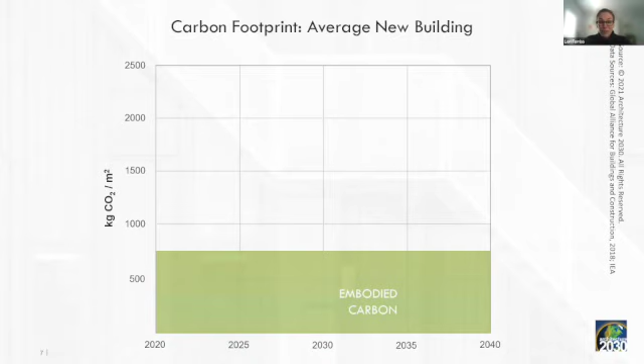When we think about new buildings and the rate at which we're constructing, we know that the embodied carbon, the upfront carbon of new construction, is very high. And when we're looking at needing to reduce our greenhouse gas emissions by at least 50% by 2030, and to decarbonize by 2040, we just don't have a lot of time to make up these upfront emissions from new construction. When we look at operational emissions on top of that, we see the whole profile of buildings. Even if we're able to decarbonize their operations, we're still stuck with that high upfront carbon cost.

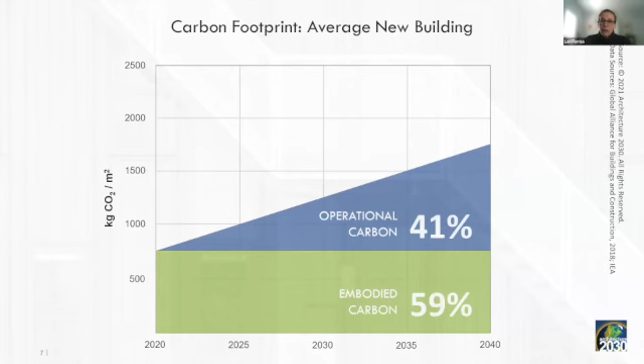We also know that existing buildings are responsible for the majority of greenhouse gas emissions, particularly in urban areas. For example, in Boston, over 70% of our greenhouse gas emissions come from our existing buildings. So we have to think about how we're going to address these numbers. We're not going to do it by building new. We have to really think about our existing buildings and figure out how to mitigate their environmental impact, both reducing our energy use and moving to fossil fuel free sources of power.

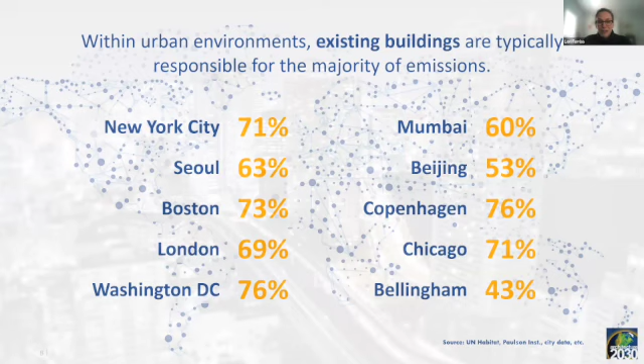And we know that most of these buildings are still going to be here by 2040. So by the time that we need to be net zero as a world, we somehow have to figure out how to address our existing building stock between now and then if we're going to actually hit our net zero target. So, we're coming back to this idea the greenest building is the one that's already built. We want to kind of shift our thinking about this and say that the greenest building is the one that's been retrofit, that we have to keep these buildings and we have to improve their performance.

So this is where the CARE tool comes in. That's the point of the CARE tool. It's not an embodied carbon calculator, and it's not a whole building life cycle assessment tool. It's really a tool that looks at both halves of the equation here, both the embodied carbon of construction of materials, both in the way we reuse buildings and in new construction, as well as the operational emissions. What are the emissions associated with buildings operating, existing buildings the way they are, buildings as we're able to reuse them and reduce their energy use, and new construction.

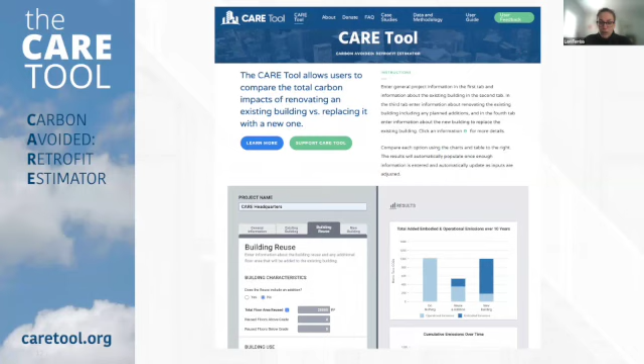So I think all of those voices have been represented in the development of the tool, which means that it's been a careful balancing act. How do we make it useful for all of these groups and provide enough detail so that it's really broadly applicable, but not so much detail that it's hard for many people to use, or that it's getting too far into the weeds. I'll talk about that a little bit.

But essentially what the tool does is it evaluates total carbon emissions, embodied plus operational, of existing buildings compared to replacing with new construction. I just want to reemphasize again, this is not an energy modeling tool. It's not a detailed whole building life cycle assessment tool. And it doesn't allow for a lot of user overriding of inputs or very specific inputs of information. And it is meant to really be used by a lot of people. It's meant to be an early level tool to ask that high level question about building reuse.

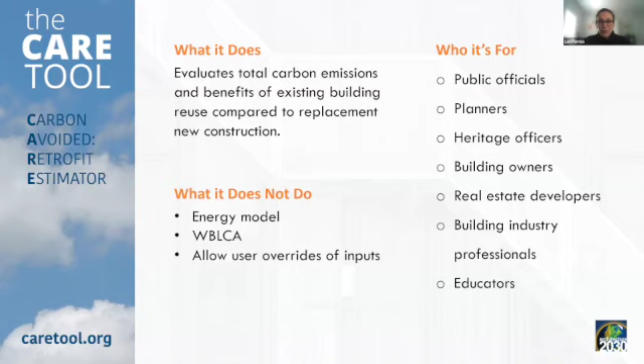So the idea is that it should be accessible to a lot of groups. It should be able to be used by planners who are trying to understand the importance of building reuse at the neighborhood scale, at the city scale. It should be useful to heritage officers who want to understand, for example, what are the carbon benefits of historic tax credits and how can historic tax credits support state carbon neutrality targets. For educators, we've seen a lot of professors wanting to use this for their students to help them build up an intuition about embodied and operational carbon in buildings, and obviously for practitioners, for many other people.

And I've already gotten into this a little bit, but the tool is pretty flexible actually. I think it can answer a lot of questions. And one thing I've heard from people who are experimenting with it is, "I think I'm using it in a way it's not meant to be used, but..." And my response is it should be used in whatever way you think is useful to answer questions. This could be looking at a single building. How much carbon can I avoid by reusing this one building compared to replacing it?

You can experiment with some of the parameters around that. So what if it's occupied and you can't do that much of an intervention to it, so you can only reduce its operational emissions by 50% or 25%? Then how does it look compared to, for example, a net zero new building? You can look at geography and grid intensity. Obviously, those impacts matter a lot when we're talking about operational emissions. And then you can scale this up and understand how existing buildings at the single building scale and then at the campus or city scale can really support decarbonization goals in the built environment.

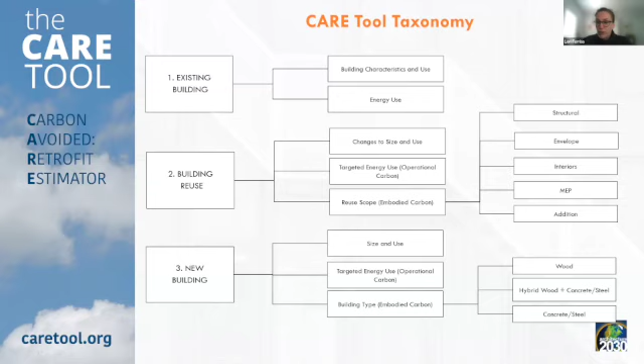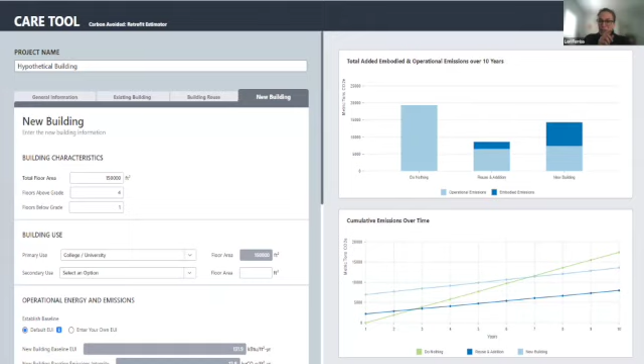And this is what it looks like in the interface. So on the left, you have all of your inputs, and then on the right, you have your outputs, and the output charts will live update as you play around with the inputs. You can experiment with different variables as you go.

And just as I mentioned, it runs through these scenarios. So first, there's some general information, which includes location, basically where is your project, from which it gleans climate information. The second tab is about the existing building, defining it. How big is it? What's its general composition? What's its structural system? What's it used for? The reuse scenario. Again, what are we doing to the existing building at a high level? Is there an addition? How much scope is there in terms of renovation? And what are we trying to achieve in energy use?

And then the new building can be the same. It could be different. For example, if you have a medium-sized building that you might renovate, but if you tear it down, you're going to replace it with something twice as big. You could look at that to understand the carbon footprint of that parcel.

And then in the end, these are the charts that come out. So on the top, you have total emissions for the selected duration, a time frame that you established, and on the bottom is looking at how those emissions play out over time. So you can understand at what point different decisions might be better or worse.

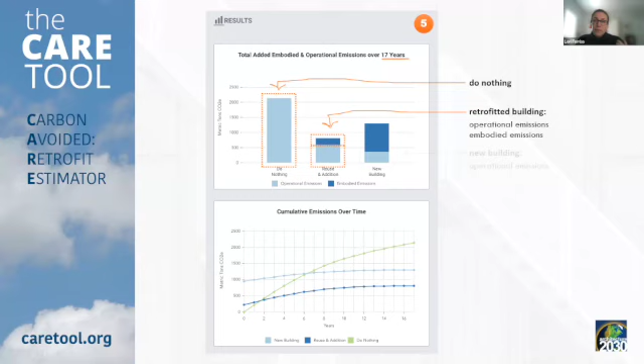So on the left, you can see what happens if you do nothing to the existing building. All the emissions are operational. In the middle is that reuse scenario. So we have, in this case, reduced operational emissions because we've made the existing building more efficient, but we have some embodied carbon associated with the renovation. And then in the new building, again, we have the operational emissions. In this case, it's a smaller bar, meaning it's even more efficient than the renovation. And then we have the embodied carbon, which is typically going to be a lot larger for a new building than it would be for a renovation because of all the materials going in.

And then on the bottom, we have our 3 scenarios shown over time. And you can just kind of see here the payback periods. I'm just going to highlight that in orange. This is essentially indicating that if you did nothing, that's the line in green, the building would operate as it always has.

If you retrofit the building, in dark blue, you have some embodied carbon in year 0, but that orange line happens at around year 1.5, which means that within a year and a half, the improved operational efficiency of this renovation has paid back the upfront carbon of renovation.

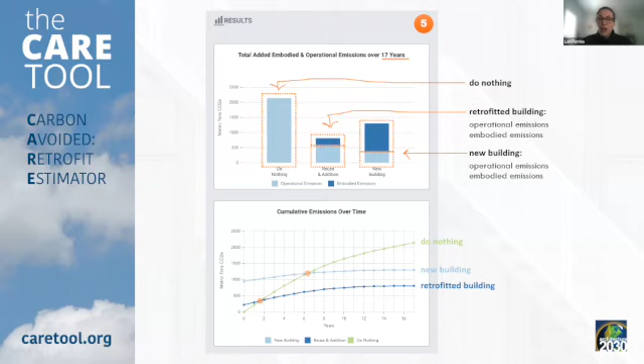As opposed to if you look to the new building, even over the 17-year time frame, the new building emissions are higher than the retrofitted building emissions, meaning that even when we look over time at a more efficient building, the new building isn't able to overcome the penalty of the higher upfront embodied carbon compared to the renovation.

I'm going to do just a little case study, but I think I'm going to do it live, easier to understand. And it'll act as a little demo. But I'll just show you this building here in Boston. It's the Boston University Admission Center, which we renovated in 2014. It is in a historic district. So while it was a comprehensive interior renovation, it was mostly a restoration of the exterior with some addition.

It was what would be considered a deep energy retrofit. It included interior insulation, roof insulation, high performance glazing, as well as new high performance systems. But with the entire renovation, we were able to preserve and reuse 86% of the structure and enclosure and reduce the operational energy use by 70%.

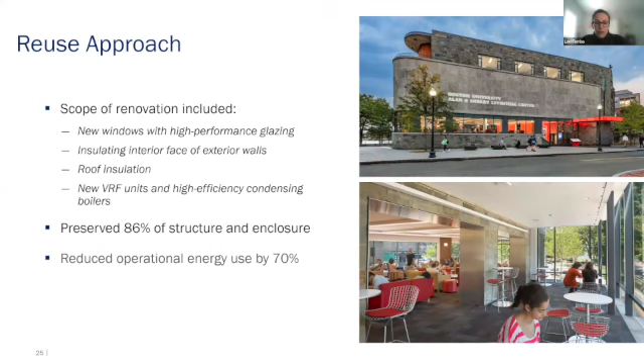So let's see, I'm gonna try and maneuver my screen here. Okay. Yeah. This is distracting. I think this will work. So you're seeing Care Tool now, is that right? Okay. Yeah. Great.

So here's the interface. I'll just scroll up so you can see the whole thing. There's a user guide, which hopefully is useful if you're using this for the first time and provides some guidance about selections users can make. There's detailed data and methodology. If you're interested in where the data is coming from and how the calculations are working, our intention is to be completely transparent about that. And there's also this user feedback button. If there's something that's confusing or not working, we really want to know.

Okay, the existing building is here in Massachusetts. I think it's not 02116, but it's close enough. I'm going to use the default climate information and the default electricity grid emissions, but I'm going to come back to this because this is where you can look at the impacts of the greening of the grid, which can make a big difference. And I'll look from now to 2030.

So I then go into the existing building. It's about 18,000 square feet, 3 stories above grade, 1 below. And it was a typical steel concrete structure. You can change the window to wall ratio if you have, for example, a historic building with 20% window to wall ratio, or new construction that's completely glazed. And this is college university use.

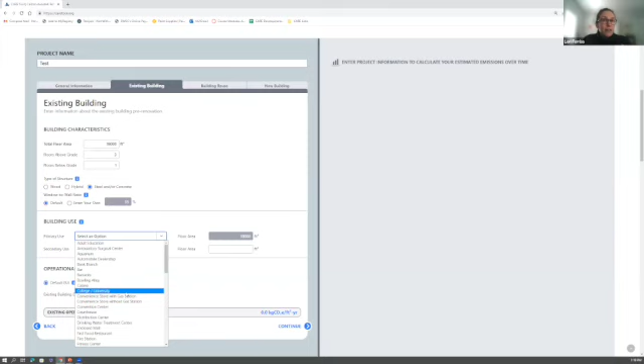I'm going to let it calculate a default energy use intensity for the existing building, although you can also enter your own here, including utility bill data if you have it. And this is going to make an assumption about the total operational emissions of the building before we renovated it.

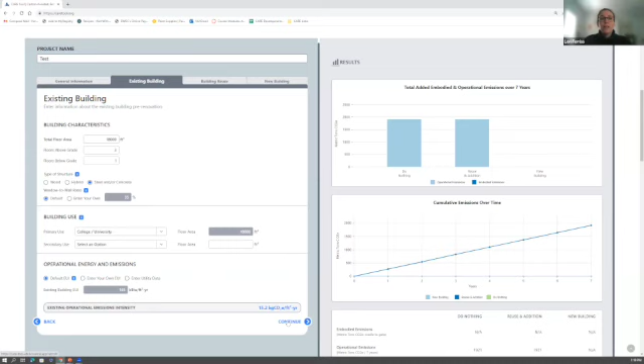We then go into the reuse tab. Here's where you can indicate if there was a large addition. Here there wasn't, so I'm going to say no. You can also indicate if there's a change of use associated with the reuse. In this case, there wasn't really, it's still college university. And then we can set our target.

So as I mentioned, we reduced the operational, actually, this is not our EUI. The baseline's changed. Here we go. We achieved a predicted EUI of 38 kBTUs per square foot per year. So you can immediately see as I enter this that over 7 years, we've saved a ton of carbon just by improving the building's efficiency.

You can indicate if it's all electric or not. In this case, it was not. There were still gas boilers in the building. But you can also indicate renewables, if there were solar, on-site or off-site. So if there's solar, or if you're purchasing renewables from somewhere else, you can indicate that.

And then we do our embodied emissions. So again, this is in these four buckets: structure, envelope, interiors, and MEP systems. There wasn't very much structural work associated with this project. There's a little bit of reinforcing and some new openings. Close this up. And as you input each one of these categories, you'll see it start to populate the embodied carbon intensity associated with each of these interventions.

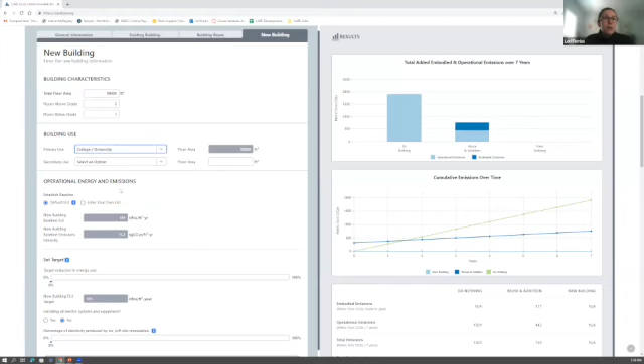So I can continue. This tab's much easier. I'm going to leave the new building geometry the same as the existing building, just to compare apples to apples. I'll give it the same use type. Here's where you can kind of play around with the impacts of efficiency of the new building. For the sake of argument, I sometimes like to make the new building more efficient than the existing building, because that's the argument we often get, is that a new building would be more efficient. It typically doesn't have to be that way, but just for the sake of argument here, I'm going to make it all electric because it would have to be now in Boston, but I won't give it any renewables yet.

And then for the embodied emissions, I'll say it's steel and concrete, because I think that's most typically what it would be. And again, I'll give it those high performance MEP systems. So those are all the inputs. As I mentioned, the new building's much easier. And on the right, we can see that the new building has a much higher embodied carbon and a slightly better operational emissions number here. But over a 7-year duration, we can see that relatively the new building is a lot higher. It's much more carbon intensive than reusing the existing building and making it more efficient.

And you can also see how that plays out over time, that the carbon payback of the renovation is about 1.5 years. The new building would still pay back compared to doing nothing to the existing building. But if we look at the new building compared to renovation, obviously the new building is higher carbon than the renovation. And I'm just going to show you what it looks like to toggle some of these assumptions. So, what if the new building were net zero?

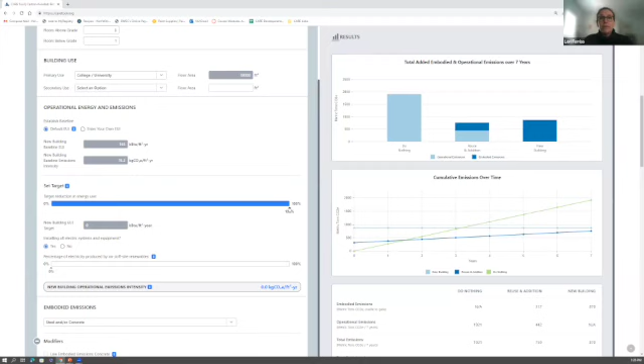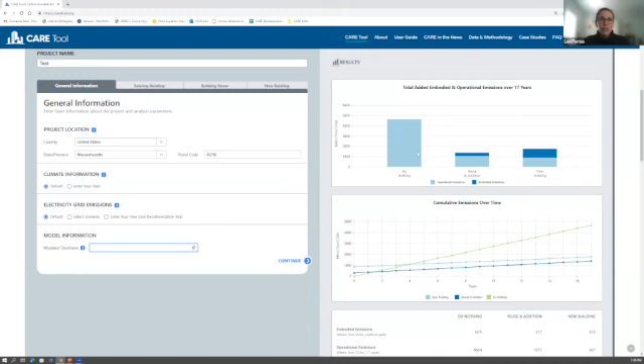So I'm going to put this back and just show you a couple of other inputs you can toggle. It's interesting to look at the time frame of the study. If I'd made this 17 years instead of 7, you can imagine how the operational emissions start to play a much heavier role. It's a higher proportion of operational emissions because the upfront emissions still happen in year 0, and you're looking at a longer play out of those operational emissions. So now if I make the new building net zero, you're going to see these lines cross at about 9 years.

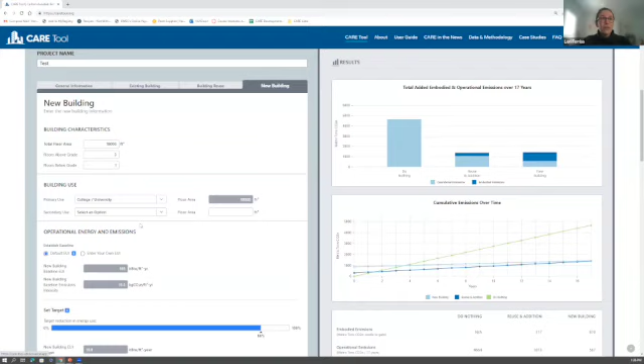Put this back. And I mentioned the greening of the grid. You can enter your own grid decarbonization year, or you can use these pre-selected scenarios, which are based on projections of how quickly our grids are actually decarbonizing based on our geography. And so you'll start to see a kind of curve if full decarbonization is by the year 2050. You'll start to see these lines flatten out as the grid becomes green and emissions go to zero when the grid is cleaner.

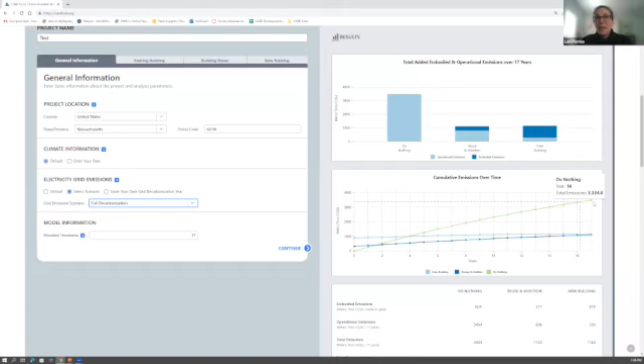I'll give you a few takeaways and next steps, and then I'll open up for discussion. We've been obviously playing around with the tool a lot and hearing a lot of feedback from people who are starting to use it. I think a lot of what we're finding from running the tool over and over are common sense things, right?

So anyway, we know that reusing an existing building is the greenest thing you can do, especially if you can make it net zero. If you can make a very high performance renovation, that will almost always be the lowest carbon option. But we know that just reusing buildings on its own is not enough. We have to reuse the fabric, and we have to improve our energy efficiency and decarbonize the building's energy use.

We also know that, as I mentioned, operational emissions matter the longer out you look. So I think it's critically important that we reduce our emissions in the very near term, which means those upfront emissions matter, but we also have to look over the longer time frame. And we know that location and grid matter a lot. When you toggle those decarbonization years of the grid, you can really understand how the outcomes of the choices you make around how we reuse buildings will change a lot depending on how quickly our grid becomes decarbonized.

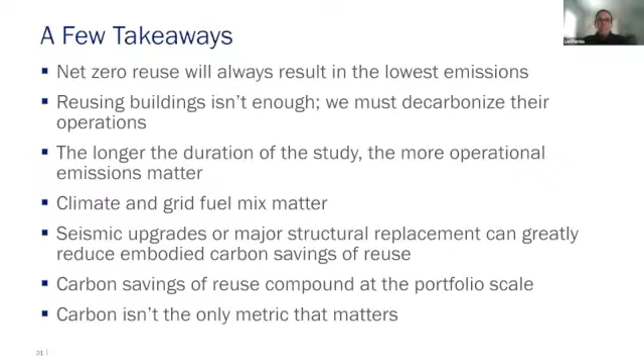So I think that's another important thing: we can't be so myopic and just measure this based on carbon, although carbon is obviously a very important metric, especially when we're trying to tie the many co-benefits of reuse into the climate conversation in a real quantitative way. I'm going to end there and open for questions.

Thank you, Lori. To kick off questions, I actually had two. I know you had just gotten into this by saying that carbon isn't the only metric, but oh, whoopsie.

But what do you think could be added to this tool? You had said, looking at the whole building perspective, what, going down the line, would you want to use to refine it or add in to make it more effective for all the stakeholders to use? Yeah, that's a great question.

So first, I just want to acknowledge that Olivia Wang is here from Goody Clancy as well, and she worked a lot on the data validation in the back end of the tool. So I might throw some questions to you as well, Olivia. Sorry, I didn't acknowledge you there earlier.

But in terms of what's next, I think the developers had our own ideas about what would be next, and then as the tool has become public, we've gotten so much feedback around different areas where people would like to use the tool that it's perhaps skewing our direction or incentivizing us to go in other ways.

But one thing I did mention a little bit is the social cost of carbon. We get asked a lot about the dollar cost of these. Repeatedly, we are asked, can you incorporate financial outcomes into this tool, because that's what people care about? And we've consistently said no, that's not the point of the tool, and it's very complicated and fluctuates greatly in any economy, is regionally specific. There are so many variables.

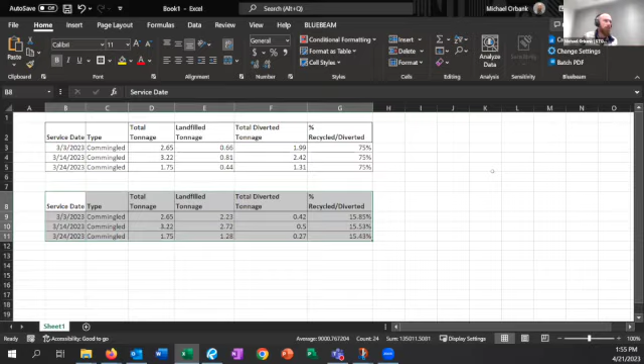So I would ask as homework, if you want to take a look, if you are on the contractor side, if you are on the design side and you have a LEED project or a project that's reporting out, to just take a little bit more scrutiny and be curious enough to ask where the data is coming from. Some processors such as ReRox or Resource Roxbury will present that data, but for others who do not, where are we getting this data from? Because only through transparency and actual reporting can progress happen. Just wanted to share that as something that rocked my world.

Laura, I'll open up to you if you have any last thoughts. No, I think I'm sad that Allison jumped off. Lori, that's why I said don't worry about the chat, because Allison was saying she had to go and it's her birthday.

So we'll have to wish Allison a happy birthday, but a timely question, I guess, for the group.

And certainly, even if you're joining for the first time and you're interested in joining this group more in the future, feel free to respond. But certainly for those who've been part of this group for a while, we're called the reuse subcommittee, and we've been, since our inception, really focused more on material reuse and less on whole building reuse and adaptive reuse at that scale. And I would say that that's not intentional. A bit of it has been by virtue of the types of projects that Michael and I work on most often and the scale of projects.

But just because we're co-chairing this group doesn't mean that it's only self-serving. We want it to be inclusive and meet the needs of the broader Boston market. So I feel like there's certainly a miss in just focusing in on that material level reuse. And so this was a timely presentation, Lori, to have you come in and talk about the whole building reuse question. And I know Michael and I want to loop in with Allison a bit more. She's been bringing up the idea about having a design charrette, connecting with the policy group, seeing what's reuse policy, where do we intersect with the CLF policy group.